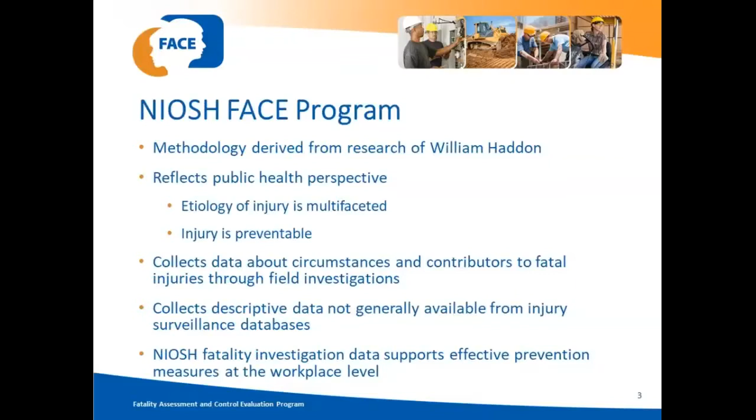The incident occurred at a private residence in a suburb. The building was a 1.5-story building with a complex roof gable. The roof heights varied from 13 feet to 27 feet, and the roof pitches were between 8/12 and 10/12. The laborer was working on the garage roof that measured 23 feet to the peak and 13 feet to the eave. The residence was located on a mainly flat plot with a manicured lawn with shrubbery surrounding the perimeter. A concrete driveway led to a 2-car garage, and a concrete pathway led to the front door.

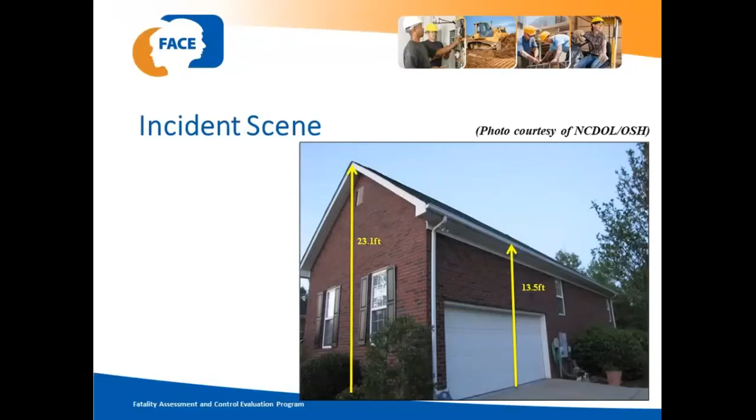The 37-year-old Hispanic construction laborer began working his first day on a residential roofing replacement project. He and 7 other employees were assigned by a subcontractor to a 2-day project to remove, replace, and dispose of roofing shingles. He was working alone on a garage roof at the time of the incident. It is believed that the laborer lost his footing and then slipped down the roof, falling more than 13 feet to the concrete driveway. He was not in the view of the other workers on the roof at the time of the incident.

Based on photos retrieved from the scene, the anchor for the laborer's fall arrest system was installed laterally across the roof and then pulled from the peak, as you can see in this photo. The lifeline was found coiled near the laborer's hand. The rope grab was attached to the right leg webbing of his harness, and the energy-absorbing lanyard was attached to the roof anchor. Additionally, there were damaged fibers at the 25-foot mark of the 50-foot lifeline, which you can see in this picture.

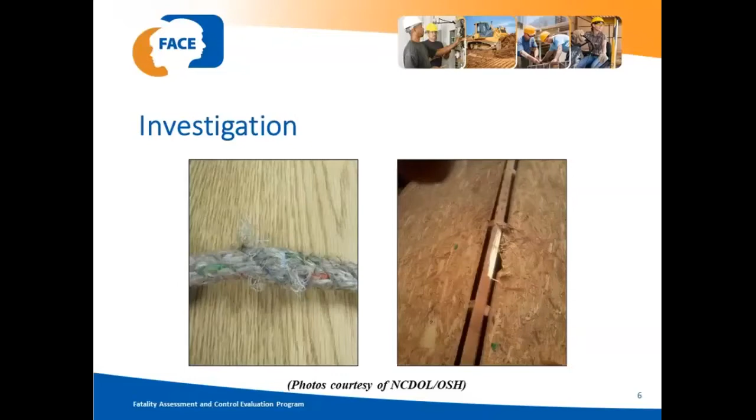When we evaluate an incident, we gather a list of contributing factors, where if these were removed from the case, the event might not have happened. We found the following contributing factors involving the distance, the roof pitch, the working length of the fall arrest system, the lanyard attachment, the anchorage method, and the worker experience and training.

Once we identify contributing factors, we create recommendations based upon these to prevent incidents from happening in the future. We try to place these recommendations in order of precedence. We draft recommendations, but we do not place blame on any party.

I think I skipped a slide. I did. I went back. Sorry.

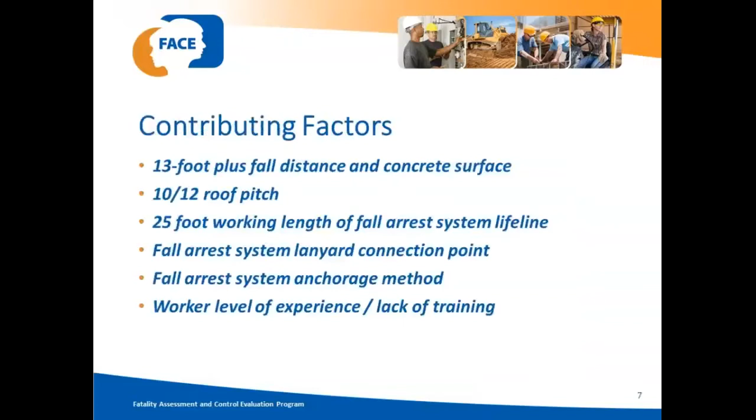There we go. The first recommendation for this investigation was employers should develop, implement, and enforce a comprehensive safety program in the language and literacy level of all employees. The second recommendation was employers should ensure that all employees working from heights are provided with fall prevention training that complies with OSHA in a language and literacy level that all employees can comprehend.

In this case, fall protection equipment was provided by the employer, but no training was provided to the employee on fall hazard recognition, procedures for erecting, dismantling, disassembling, and inspecting fall protection systems, or the limitations of the equipment. The laborer was from Honduras, and his first language was Spanish.

Employers in residential construction, including subcontractors, are required to provide employees with fall protection systems when employees are walking or working on a surface, horizontal or vertical, with an unprotected edge or side which is 6 feet or more above the lower level. Employers are also required to provide training.

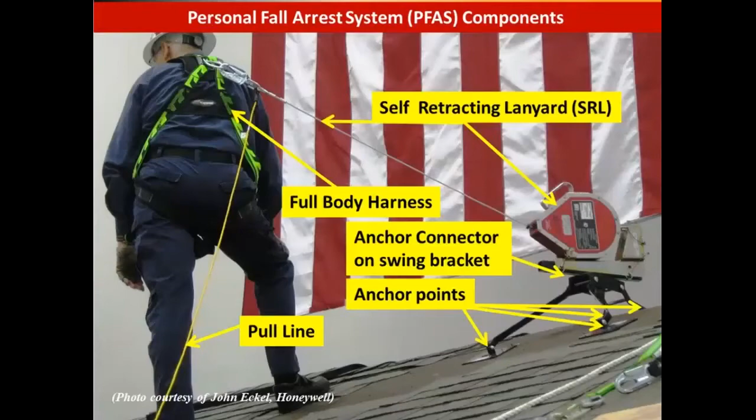A personal fall arrest system is designed to stop a worker's fall before they strike the lower level. In this photo, you can see a personal fall arrest system, which includes a harness, an anchored self-retracting lanyard, and a pull line. Employers should ensure that all employees are provided with properly assembled and maintained fall protection systems when exposed to fall hazards.

According to personal fall arrest system manufacturers, the attachment point of the body harness to the lanyard lifeline system shall be located in the center of the wearer's back near the shoulder. You can see the harness there and the attachment point in the back. The laborer had attached the lifeline with rope grab to the right leg webbing of his harness, and the energy-absorbing lanyard was attached to the roof instead of the dorsal D-ring.

And you can see in this photo where the lanyard is and where the lifeline is, and that is not attached to the anchor point of the roof. And that was not a well-attached system. And this is the correct order of the system.

He coiled the excess slack of the lifeline instead of using the rope grab, which you can see in this picture. And he should have used the rope grab to reduce the lifeline slack instead of coiling it in his hand. It was his first day on the job, and he had not been trained to recognize the fall hazards or taught methods of fall protection.

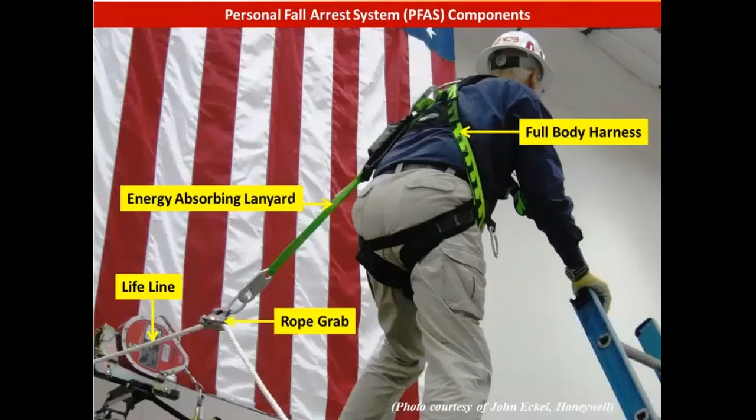Personal fall arrest systems should be rigged such that an employee can neither free fall more than 6 feet nor contact the lower level. These diagrams show the working range and the swing fall hazards. There was only one anchor installed on the ridgeline in this incident. The manufacturer recommends anchors to be installed a minimum of 5 feet from the edge of the ridge and at a maximum of every 5 feet along the peak.

The laborer's lifeline was rigged at the 25-foot mark with a 6-foot lanyard, which gave him 31 feet of rope, and the fall arrest system was anchored approximately 23 feet from the ground. He was also working laterally away from the anchor point, allowing the swing effect in the event of a fall. In order to minimize the swing effect, workers should work directly below the anchor and not extend their work area beyond 30 degrees of their anchor point.

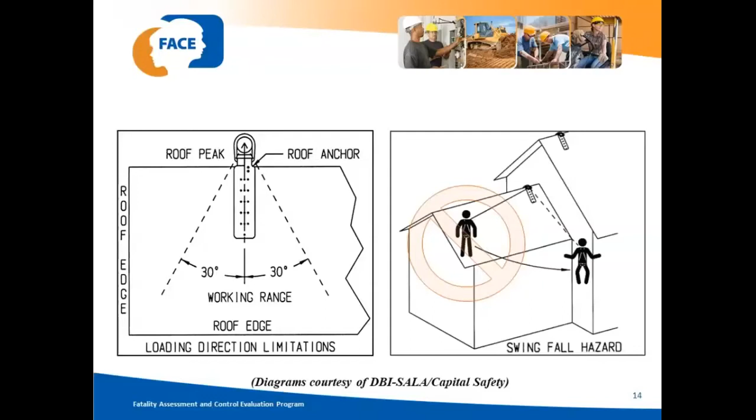Employers should assign a competent person to inspect the work site before work begins to identify fall hazards, determine the appropriate fall prevention systems for the workers, and ensure personal fall arrest systems are installed properly.

And our final recommendation was general contractors should ensure through contract language that all subcontractors have implemented comprehensive safety programs that appropriately address the tasks their workers perform. A multilingual safety program and training may have allowed workers to better understand the safest way to perform this roofing job.

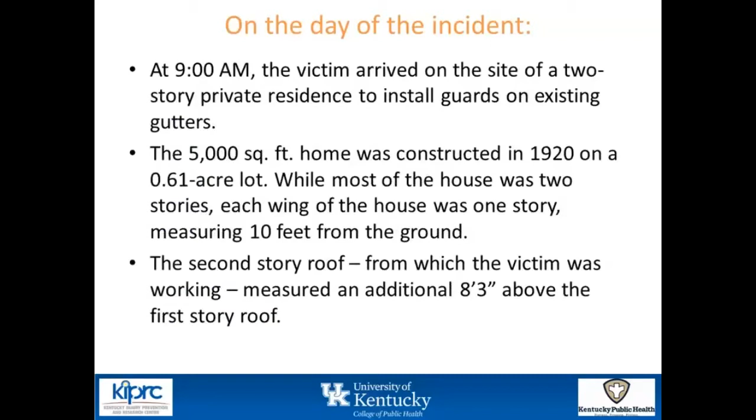So on the date of the incident, the victim was working from the 2nd story roof for about an hour when the owner arrived to check on his progress. The owner had instructed the victim on what part of the house he wanted done first. After surveying what he had done already and informing him on what he wanted done next, he told the victim that he was going to leave in order to get some additional supplies.

As the owner was leaving the property, he spoke to the victim's girlfriend, who had actually dropped him off that day for work. She told investigators that she sometimes liked to stay around when he was working by himself just to keep him company. She would stay on the ground and pick up after him and chat with him while he was up there on the roof.

So as the owner was leaving the residence around 10:51 a.m., he said he last saw the victim sitting with his legs folded in front of him, leaning towards the gutter. Within about 30 seconds of pulling away from the scene, the owner was flagged down by the girlfriend, stating that she had seen her boyfriend fall from the second story and land on the first floor roof. And by the time she and the owner ran back to check on him, he had fallen from the first floor roof onto the ground.

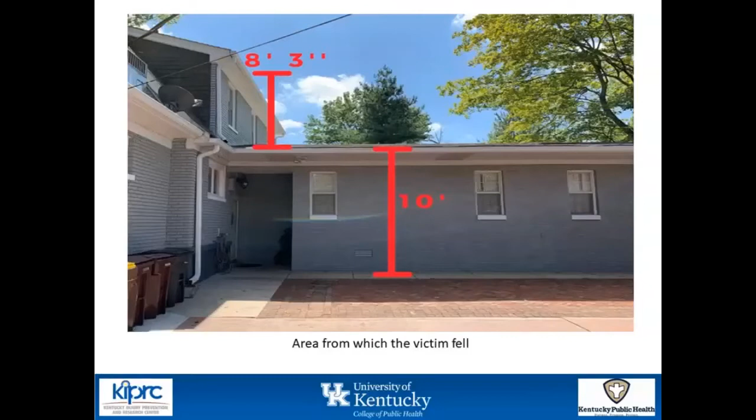Right about where the top of that 8'3" marker is where he was sitting. Right about the bottom of that one is where he landed. And then when he fell again, he fell from the roof of the first floor down onto where the brick meets the sidewalk.

So when they ran back around to the back of the house to check on him, they found him laying unconscious on the driveway. When first responders arrived, the girlfriend had told them, as well as the owners, that the victim had spaced out. He appeared to be working for a little bit and then kind of just froze before he fell onto the first floor roof.

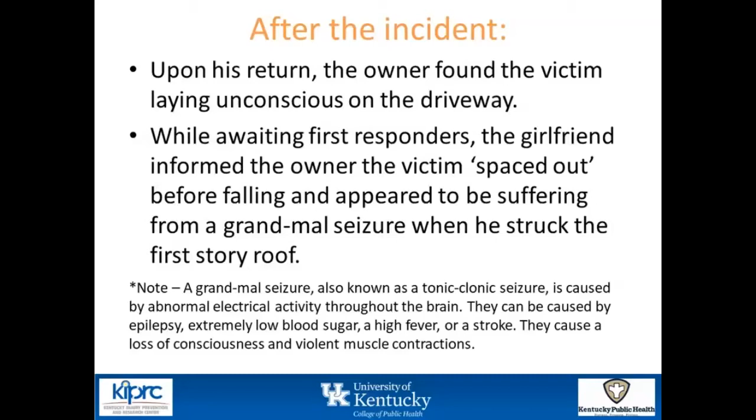She told investigators that she thinks that he began suffering from a seizure, which later ended up being confirmed as a grand mal seizure. And that's kind of the one that's stereotypical, the one that you would think about when you think of a seizure. That's the one where it causes violent muscle contractions and a loss of consciousness. It can be caused by epilepsy, low blood sugar, a stroke, or a fever, or some injury.

First responders arrived just within a few minutes, and they went to transport the victim to the local hospital. But in an interview with the EMS responder, they knew that his injuries were pretty severe, so they performed what they called a hot load, meaning instead of taking him to the local hospital, they stabilized him and took him directly to the helipad, where he would be flown to a much larger hospital.

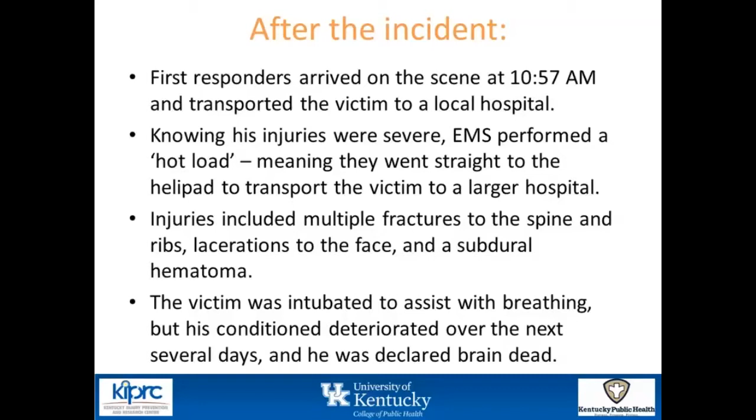The injuries that the victim had: multiple fractures to the spine and ribs, lacerations on his face, as well as a subdural hematoma. He was intubated to assist with breathing when he arrived at the Metropolitan Hospital, but over the next several days, his condition deteriorated until he was declared brain dead. The victim died 7 days later on July 27th. His death certificate stated that he had died due to blunt force trauma and injuries of the head due to a fall from a roof caused by reported seizure issues.

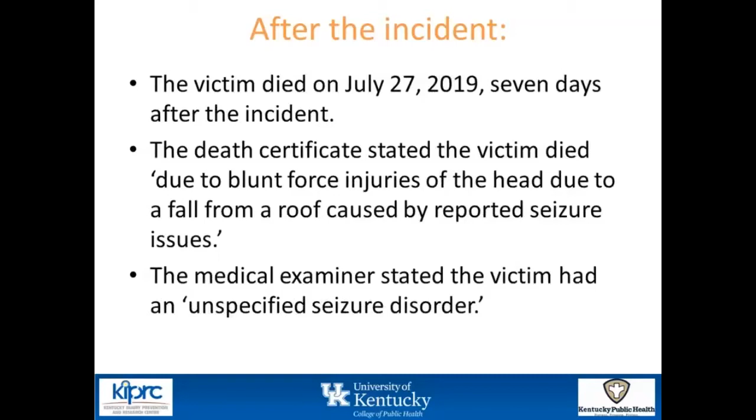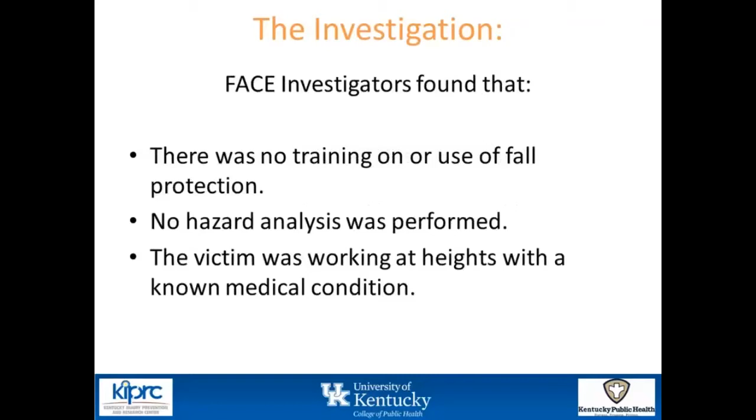And that's where this incident takes a little bit of a unique turn. This is one that we hadn't really looked at before. The medical examiner stated that the victim had been diagnosed with a, quote, unspecified seizure disorder. So when we did our investigation, we found that the worker was working at heights with no fall protection, nor was he trained on any. No hazard analysis was ever performed, and the victim was working at heights with a known medical condition.

So we made a couple of recommendations. We informed the owner of the company, as well as when we disseminate this out, that employers should train their employees on and enforce fall protection when working at heights at or above 6 feet. They should also consider implementing a job hazard analysis process for every new job that they're on. And employers who learn of physical disabilities which pose a direct threat to employees' safety should perform threat assessments to evaluate his or her ability to perform the job.

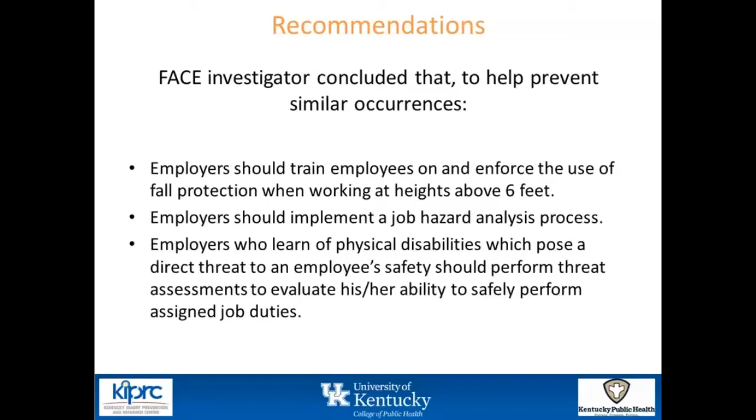So I want to talk about, before we go into some of the recommendations, this employer, 3 years previously, had been cited by Kentucky OSHA for several violations while performing roofing duty like this. At that time, he was fined for allowing 6 employees working at heights of up to 56 feet. OSHA investigators observed an employee in the aerial lift putting his feet onto the rails and not having them firmly on the basket floor. They were also working from the lift without a lanyard, and the owner never asked for any fall protection certifications for subcontractors.

So we know that this employer has had issues, we'll call them, with enforcing fall protection in the past. And just 3 years later, both him and the victim worked at heights at 18 feet without fall protection. And we know that the owner also worked at this height without fall protection because the owner of the residence had a Ring security camera. And so when OSHA gathered all their information, they could see that the owner went back up without fall protection to that top floor roof in order to gather materials.

So because he was a repeat offender, Kentucky OSHA cited him for the most serious violation that you can have. There were 2 serious willful violations, one of the standard duty to have fall protection in residential construction, as well as training requirements on that. And when they talk about willful violations, that means that they believe that the owner had an intentional, knowing, or voluntary conduct that demonstrated a careless disregard or just a plain indifference to the law. They know that through the previous investigations that this owner knew what he was supposed to do and still ignored it.

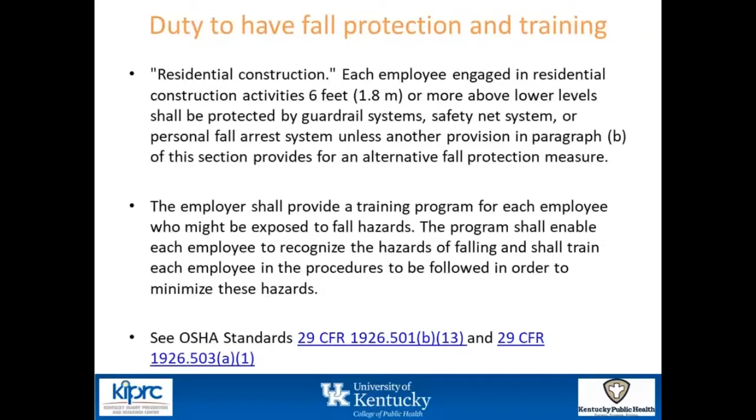Job hazard analysis. This was their first day on the job, so we believe that they could have performed an analysis and seen what kind of dangers they had been facing. And of course, the owner stated that he didn't do one because, I'm sure you all have heard it before, they've had plenty of experience in this type of job, and they felt they knew what the dangers were. And he even acknowledged to investigators that he knew working from heights was dangerous.

The JHA has been around since about 1994. It's a technique that's used by supervisors and experienced employees in which they focus on job tasks and then try to identify potential hazards that workers may encounter when performing each task.

Now the part with the physical disability, this is kind of where it was a unique case. We dug a little bit into the unspecified seizure disorder that was listed on the death certificate. The victim's girlfriend actually confirmed that he had epilepsy. And so we did a little research on that. Epilepsy is a central nervous system disorder in which brain activity becomes abnormal and it causes seizures or periods of unusual behavior, sometimes a loss of awareness. And the CDC states about 1 in 100 people in the United States suffer from epilepsy.

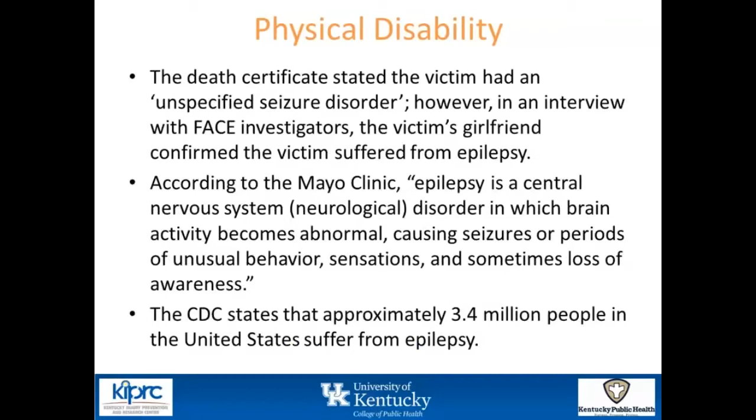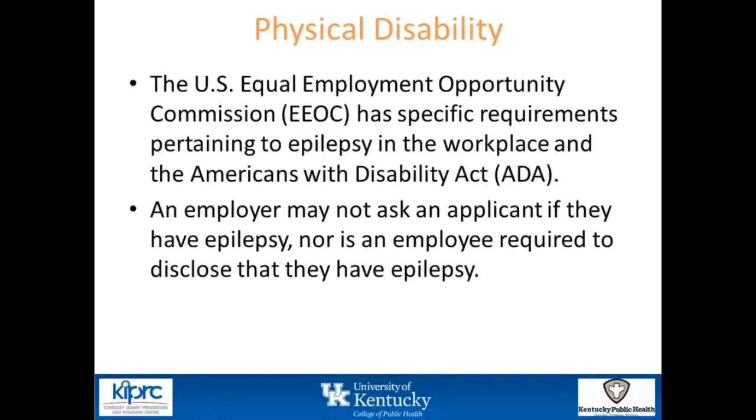So the United States Equal Employment Opportunity Commission has very specific requirements when it comes to working with epilepsy, and it's covered under the Americans with Disabilities Act. An employer may not ask an applicant if they have epilepsy, nor is the employee required to disclose if they have epilepsy. If during the course of work an employer learns that their employee has epilepsy, they may ask for medical information, but they can only ask for information needed to make an assessment on the employee's present ability to perform their job safely.

An employer may exclude an individual with epilepsy from the job for safety reasons when an individual poses a direct threat. But the direct threat must be a significant risk of substantial harm to the individual or others that cannot be eliminated.

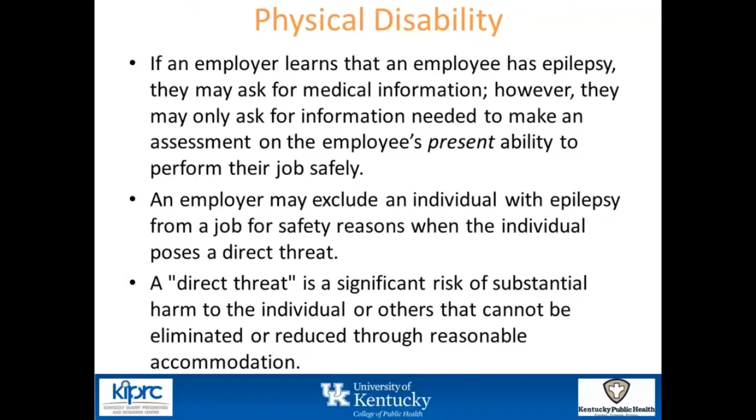So if the owner had done a direct threat assessment here, he could have also taken into consideration the duration of the risk, the nature and severity of potential harm, and the likelihood that the potential harm could occur. We believe that if he had done this direct risk assessment, not only would he have realized that this individual was working at heights unprotected with a known medical condition, but that he was oftentimes working by himself. So even if he did have fall protection of some sort, say he was wearing a lanyard, if he was by himself and had fallen while experiencing seizure behavior, there's a very high chance for suspension trauma. So I think if the owner had done his due diligence, we believe he might have realized this.

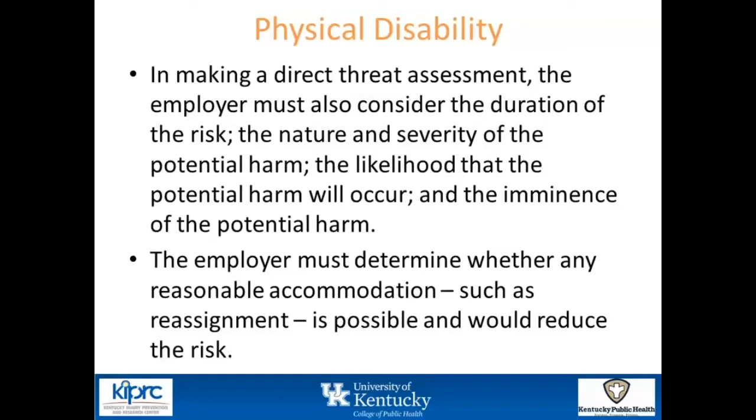The owner was aware that the employee had suffered from seizures in the past, but he did continue to allow this employee to work at heights unprotected. And we recommended that once the employer learns of the disability, the employer should perform that direct risk assessment and evaluate the employee's ability to safely perform their duties.

So what happened afterwards? I actually filed an open records request for the case. The owner was fined $145,000, 2 willful serious violations, as well as a less than serious violation for failure to report the hospitalization. The owner filed a formal contest of the charges, claiming the worker was only a contractor. You know, I'm not a litigation officer. I don't know if that's going to hold up. It seems like the employee had worked solely for this owner for several years now. I mean, just for me, it's a pretty lame excuse, but that's what he was trying to go with. And as of this presentation, the litigation is ongoing.

So based on this, we actually made this little infographic for the presentation here, talking about the construction workers that have died from falls between 2000 and 2018.

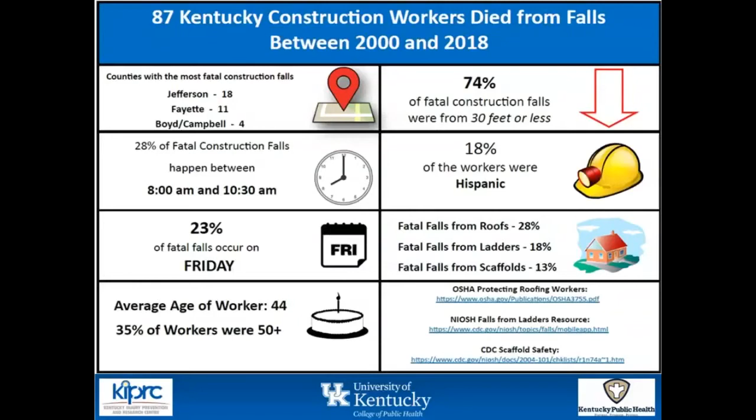Going back to Jennifer's presentation, we have almost 1 in 5 construction workers who fall who are actually Hispanic. Most of them fall, well, a plurality of them fall from roofs, and we actually see that almost 1 in 4 take place on a Friday. Here are our sources, and that's the end.

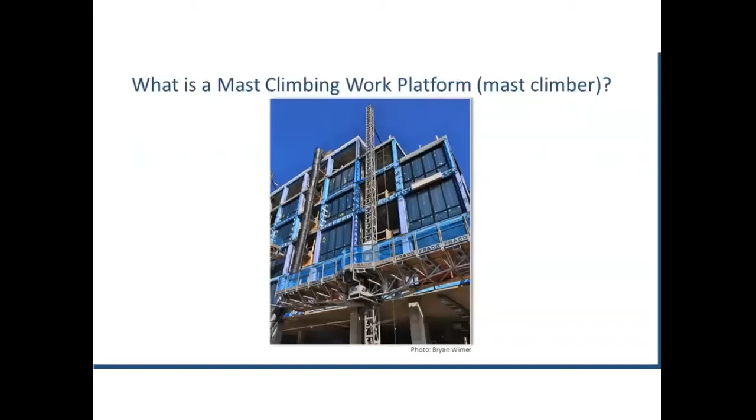So to jump right in, for those who might not know, what is a mast climbing work platform, or a mast climber as it's known? So you'll see here a picture of what would be considered to be a typical configuration of a mast climber. So a mast climber is a powered work platform that is hooked onto a mast, and that platform can then be driven up and down the mast to get workers to height to perform their work.

So the platforms themselves can be configured to building configurations, as you'll see in this picture. There are different attachments that can be put on mast climbers. They can be freestanding if the work needs that. Typically, they are also fixed to some kind of an adjacent structure. So these are also becoming more popular in the U.S. as a way of replacing traditional scaffolding, or just kind of an alternative depending on what the different buildings and structures that are being worked on are.

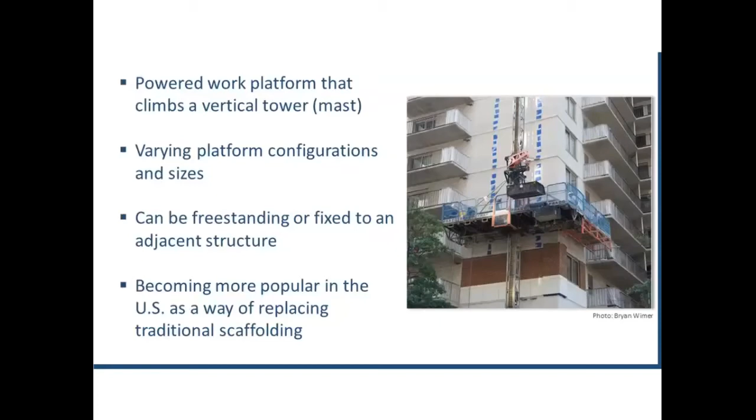So it's estimated that in the U.S. every day there are up to 15,000 mast climbers being used. Most of the time there will be 3 to 4 workers on each platform section. So that's close to 50,000 workers that could potentially be on mast climbers every day in the U.S.

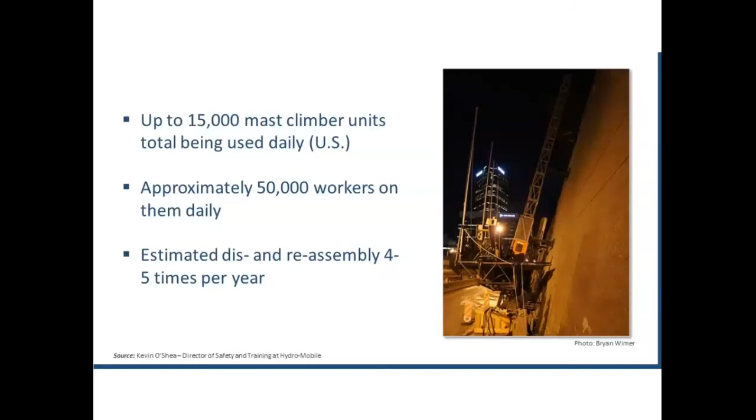So one of the other things with mast climbers that makes them attractive to companies is that they are relatively easy to assemble and disassemble and move around at different parts of the construction site. And it's estimated that a typical mast climber on a job site would be taken down and put back up maybe 4 to 5 times a year as they move it around the site or the building.

So at NIOSH, we have performed several other research projects with mast climbers. Before we did this, though, we went to the Fraco site in Baltimore, and all of our team members took installer and operator training courses just to familiarize ourselves with the equipment, what everybody else who's taken this training would be trained on before they were going to use and be certified to install or build mast climbers.

So once we did that, we had a project that looked at the stability of a freestanding mast climber with different platform loadings under a fall arrest scenario. So we took our fall arrest mannequin to the end of the platform in different platform configurations, and then we measured the stability of the overall unit and also the actual platform movement itself.

So one of the other projects that we just finished up recently was looking at the material handling aspect of mast climbers. Traditionally, mast climbers have been used in masonry. That was one of their original design intents. So there are different platform configurations and setups that users will have when doing different masonry objectives. And we looked at some of those different tasks in our motion capture lab to look at the body movement with these different platform setups and configurations.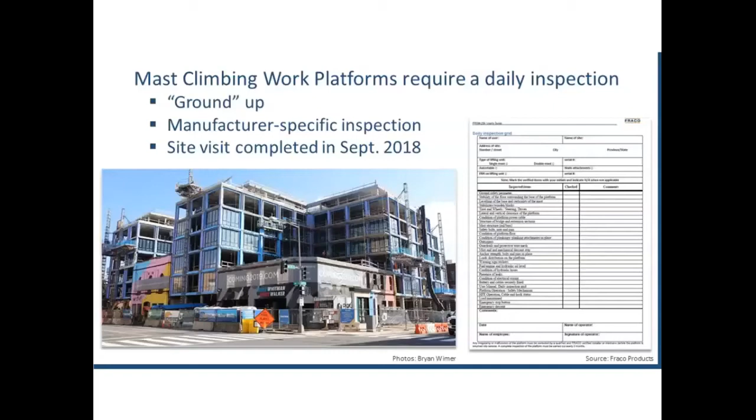And then you'll see here, it's a little bit small, but this is a daily inspection sheet that will just give you an idea of some of the points as you go down through and look at the mast climber from the ground up, what you would be looking for.

So why do you do that pre-shift or daily inspection? Most of the incidents that have been reported could most likely have been caught if a visual or pre-shift inspection was done and the workers had looked for those things.

So the daily inspection walkthrough tool that I had created has 7 pictures that we took at the job site with 19 inspection points. What it is designed to do is just to help users familiarize themselves with potential safety issues or things they would encounter when using a mast climbing work platform.

So the users are shown highlighted areas that they would look at, and then they click on that area, and it will kind of walk them through what that area is being highlighted for, what the inspection point is, and potentially what the OSHA regulation would be that would dictate why they needed to look at that one specific point.

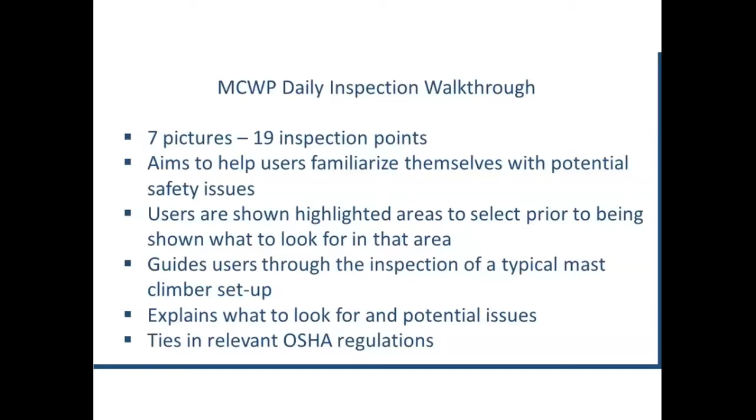So who would use this tool? The people who would use this tool would be operators and installers, as a refresher, who maybe have not been using the equipment. Maybe the company put it up for a while and then got it back out. Those who have never used the equipment and just want to familiarize themselves with it, or the non-competent persons who are on the equipment, the workers who are on it every day who maybe had been out of the construction industry for a while and then came back and were going to use it.

But we definitely want to stress that this tool does not replace official training in any way, shape, or form. It is just a tool that can be used as something of a reminder or a refresher for those using the equipment.

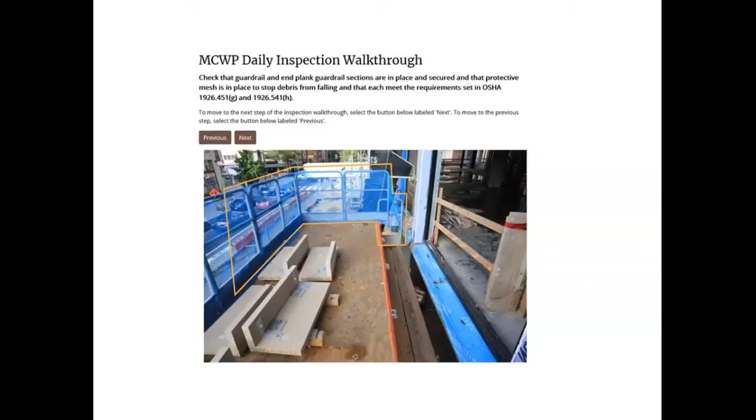And another example would be here with the platform. You want to look at that, click on it, and you would see that you need to check that the guardrail and the end plank sections are in place and secured, and that if there's going to be debris that could fall, you have protective mesh in place. And then there are the regulations from OSHA that dictate why you would want to specifically do that.

That infographic is being translated into Spanish, and that also got me thinking that we might have a way to get the walkthrough translated to Spanish. And right now, the CDC translation team is actually doing that. Hopefully very soon, we will be able to have the daily inspection walkthrough tool from start to finish in Spanish as well.